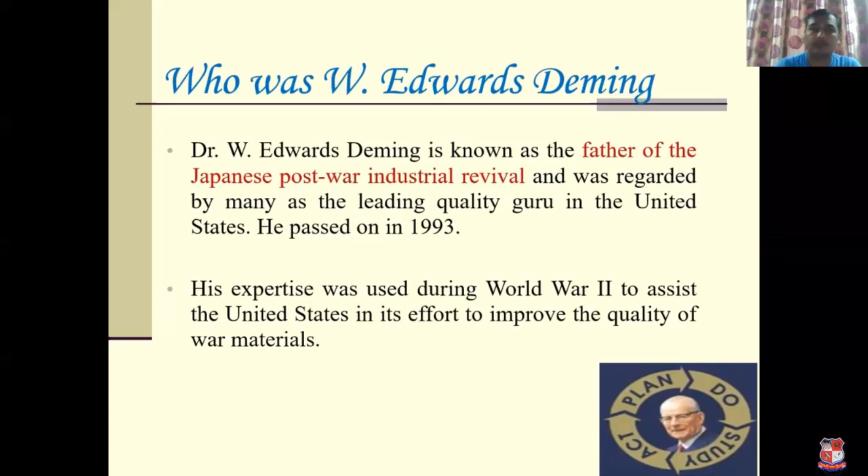So first we discuss Edward Deming. This is Edward Deming. Edward Deming is the father of the Japanese post-war industrial revival. He was basically from the United States, and he passed away in 1993. The United States of America utilized Edward Deming the most during World War II, with the main purpose to improve the quality of war material.

He got his PhD in the States in physics and maths. He got his first employment chance in an electricity company in Chicago. He taught physics, mathematics, statistics, and quality in Japan. Deming is known for a management philosophy of quality, which also improves productivity and competitive position.

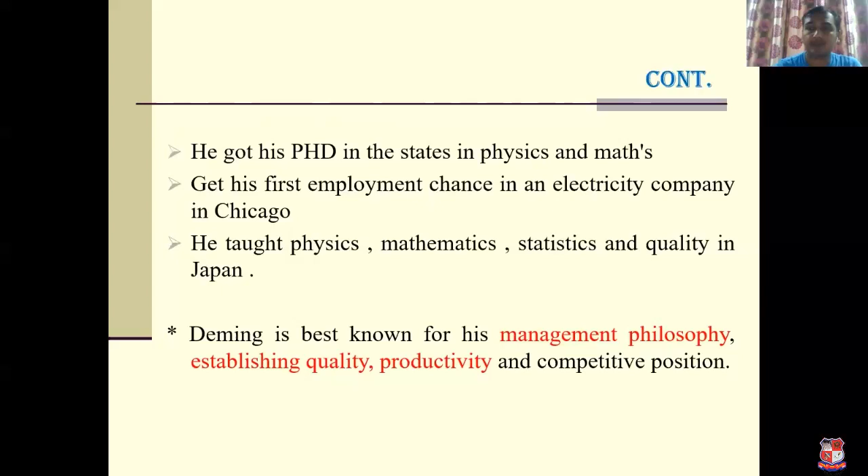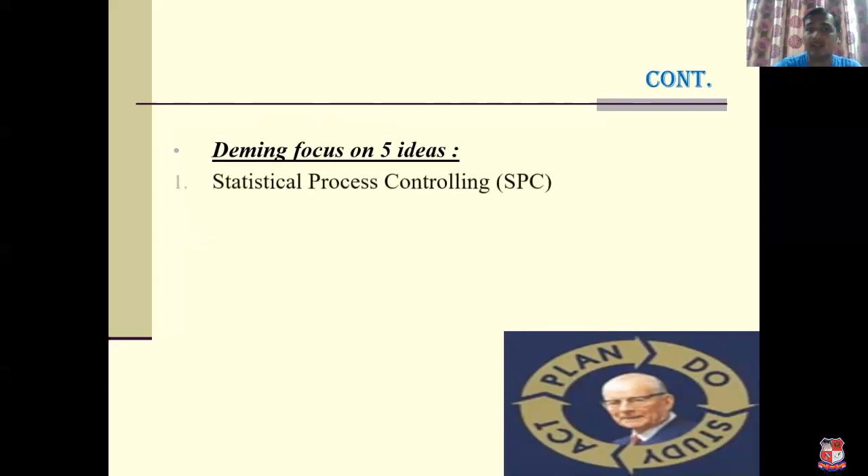Basically, Deming focused on 5 most important ideas. First, SPC, statistical process control. Second, Deming philosophy. Third, the 14 principles, the most widely used, the 14 principles of Deming. Fourth, the Deming cycle, also called the PDCA cycle, Plan Do Check Act, or Plan Do Study Act. The main purpose of the Deming cycle is continuous improvement. And the fifth one is the 7 deadly diseases of quality.

So first we discuss SPC. The main purpose of SPC is to achieve good quality. When we manufacture the product, SPC is the most important phenomenon to control the quality, meaning achieving good quality without defects. They also give the example of why a salesman cannot sell the same amount every month, and define it one by one.

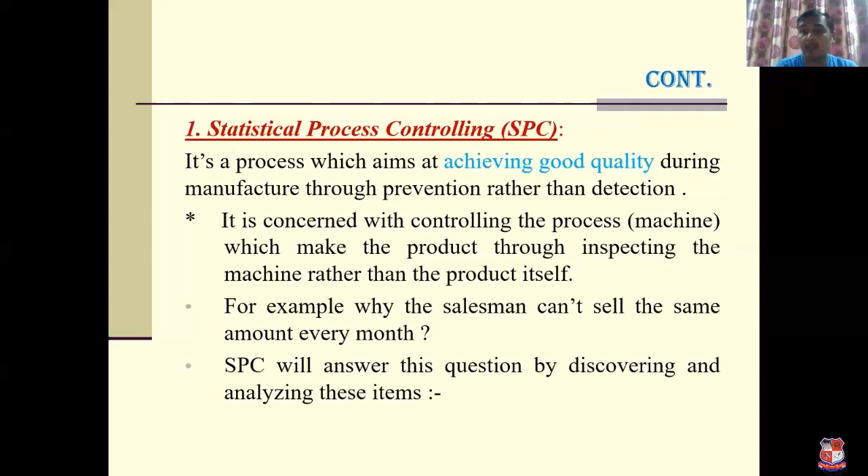They analyze items like common causes, special causes, natural variation, and significantly different variation. Common causes depend on machine failure; if the machine fails, we cannot achieve the quality. Special causes are not inherent to the process and should be defined, such as poor performance.

Third, natural variation. Natural variation means producing a certain amount of defects. It depends on the material; sometimes the material has a crack or defect inside. So it's a natural variation. And fourth, significantly different variation means discovering exactly where it is caused by management.

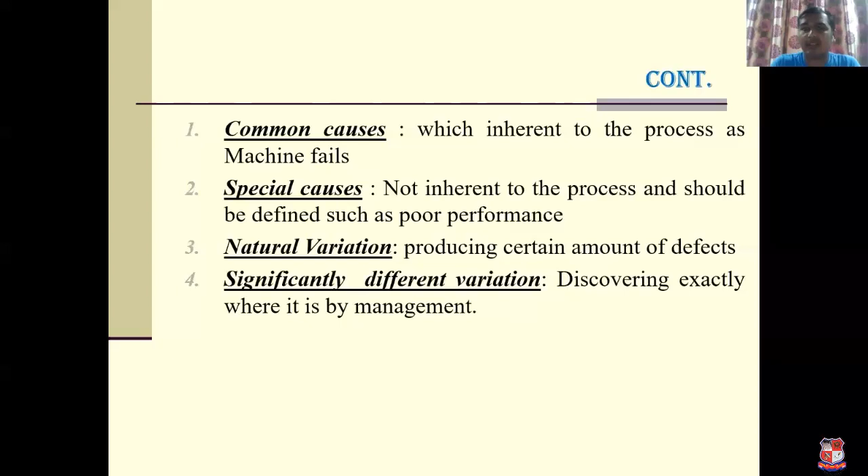Deming said 80% depends on the management and 20% depends on the employee. This is the thumb rule of Edward Deming, the 80-20 rule. It's just like a Pareto analysis.

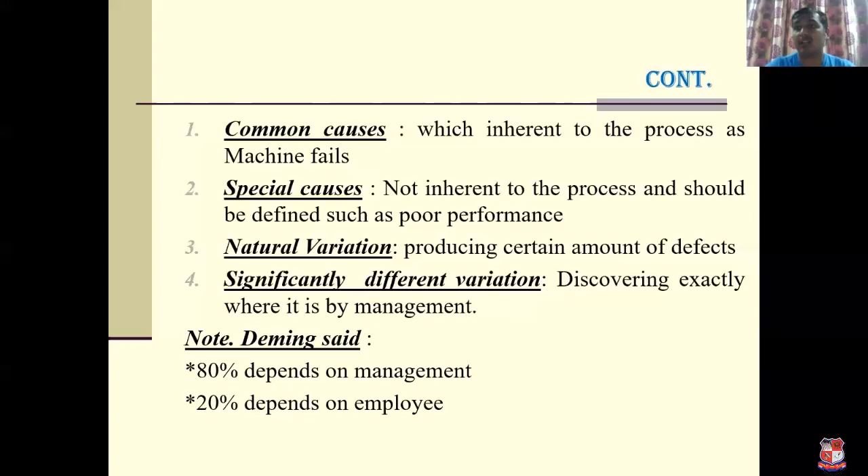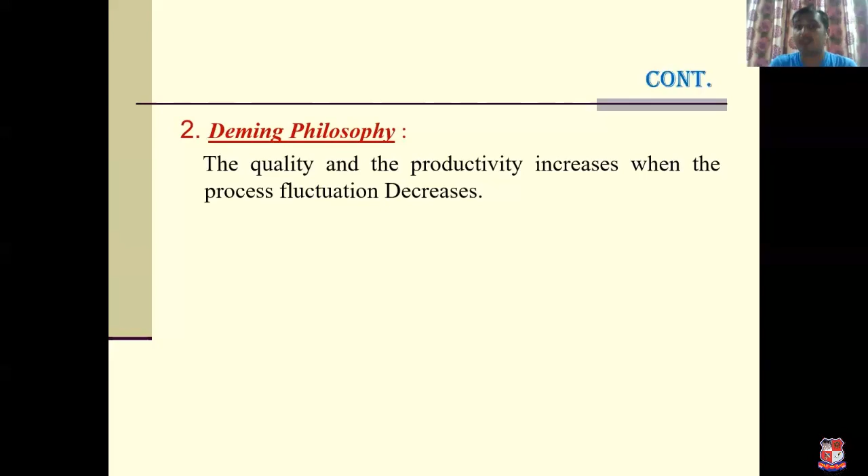Second, Deming philosophy. The Deming philosophy is about productivity: quality and productivity increase when process fluctuation decreases. This is the simple philosophy.

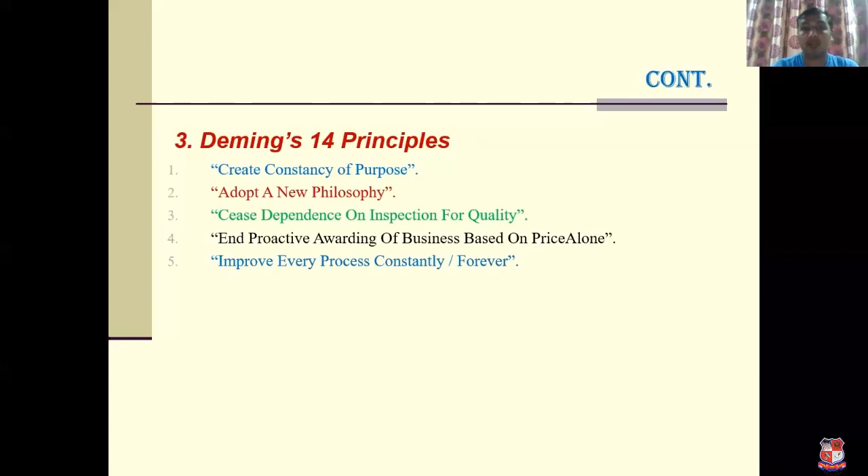Third, Deming's 14 principles. Most important is the 14 principles. We discuss one by one. First, create constancy of purpose. Adopt a new philosophy. Cease dependence on inspection for quality and ending proactive awarding of business based on price alone. Improve every process constantly or forever. Institute training. Adopt and institute leadership. Drive out fear. Break barriers between staff areas. Eliminate slogans, exhortations and targets. Eliminate numerical quotas. Remove barriers that rob pride of workmanship. Institute program for education and self-improvement. Last, put everybody in the company to work for this transformation.

So here are the 14 principles of Deming. We discuss only the first few. The first is create a constancy of purpose, meaning define the problem of today and future. Create constancy of purpose means define the problem for today and future. Other example, we can say allocate resources for long-term planning. And second, allocate resources for research and education. We can also utilize it in research as well as in education.

Second principle, adopt a new philosophy. Adopt the new philosophy means it basically depends on the quality cost. The quality cost should be less, not more. Or second, we can say call for major changes. Other thing, superstitious learning, etc.

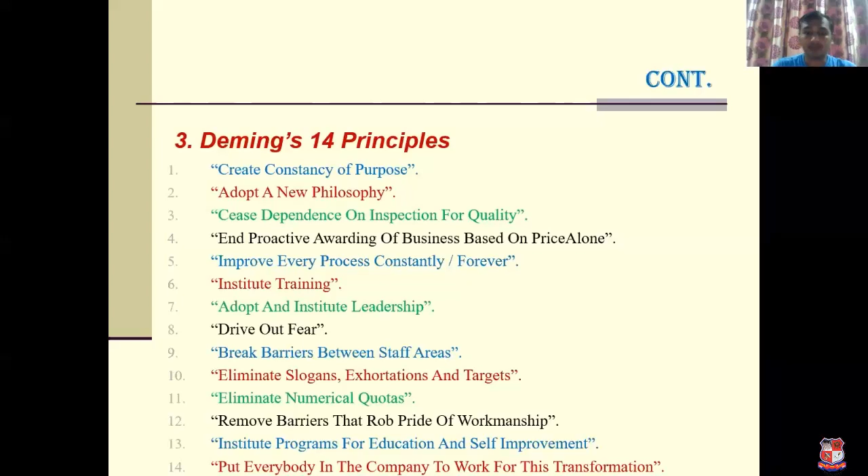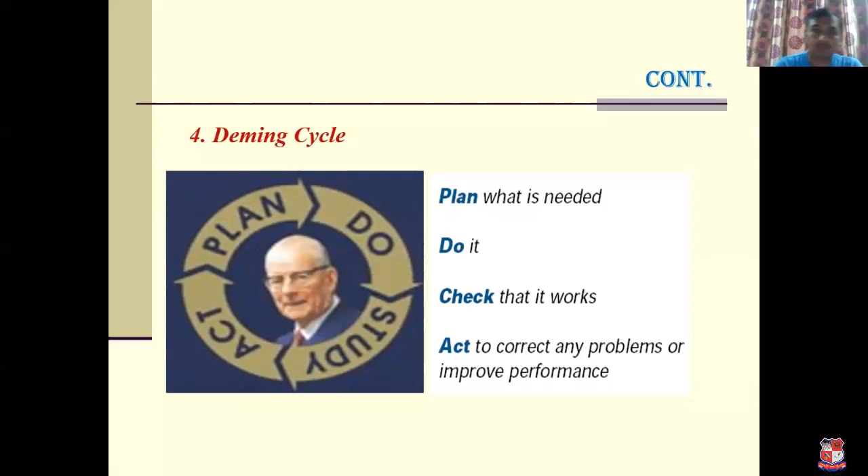Now we go to the second quality guru, Joseph Juran, who defines quality as fitness for purpose. Joseph Juran is an internationally acclaimed quality guru, similar to Edward Deming - both concepts are the same. Joseph Juran strongly influenced Japanese manufacturing practice. He defines quality as fitness for purpose or fitness for use. Joseph Juran also believed that quality does not happen by accident.

Joseph Juran proposed 7 ideas: quality definition, breakthrough concept, internal customer, quality trilogy, Pareto analysis, cost of quality, and quality concept. As told earlier, quality means fitness for purpose or fitness for use - meaning what is the real purpose, who are our customers, internal and external users, who are the possible customers? Second, breakthrough - this depends on the sequence of process improvement. It basically involves two journeys: from symptoms to causes, and from causes to remedies.

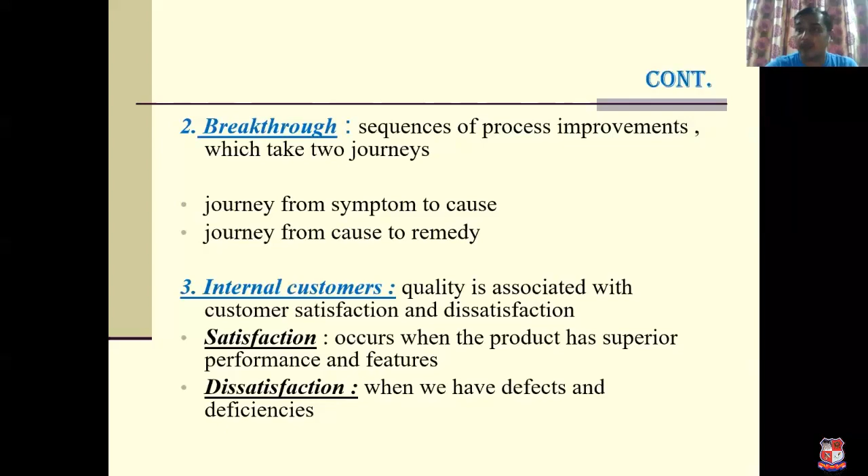And third is internal customer. In internal customers, basically what happens is sometimes the customer may be satisfied or sometimes dissatisfied. So internal customer satisfaction depends on satisfaction and dissatisfaction. Satisfaction occurs when the product has superior performance and features - if the customer is satisfied, then the product has superior performance and features. And when there is a defect or some problem, at that time the customer is not satisfied - this is dissatisfaction.

Customer satisfaction has two dimensions: internal and external. Internal means building the product or superior service correctly, and external means all the requirements should be matching.

Fourth is quality counsel, which depends on the expert.

Next we discuss Juran's quality cost. There are many costs depending on the quality cost, like appraisal cost, prevention cost, failure cost, internal failure cost, external failure cost, etc. Appraisal cost depends on inspection - it is the cost of activity designed to ensure quality or uncover defects, meaning inspection. Prevention cost covers total quality trainings and total quality plannings to prevent defects from occurring.

Next, failure cost. This is also the most important parameter in industry. It depends on defective parts or products - it is the cost incurred by defective parts or products.

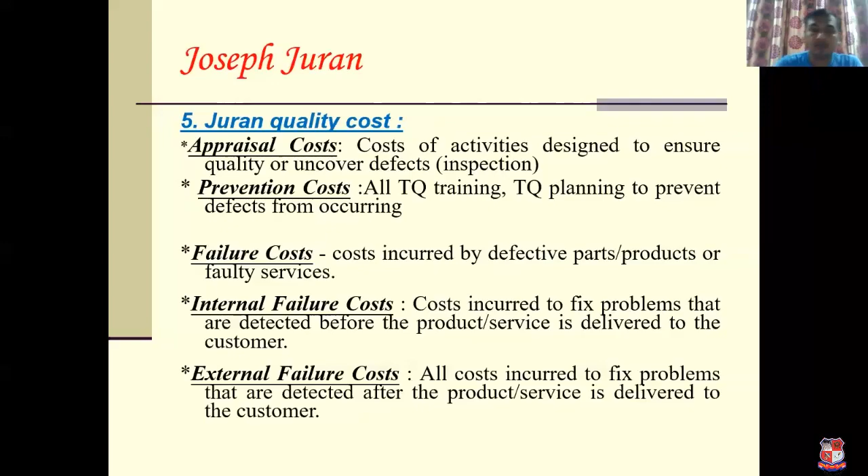Third quality guru's contribution is Taguchi. Taguchi defined the DOE. In the early 1980s, Professor Genichi Taguchi introduced the DOE, which stands for design of experiment.

The goals are: design a product or process robust to environmental conditions, second, robust to component variation, and third, minimizing the variation around the target value. Robust means the performance of the product or process.

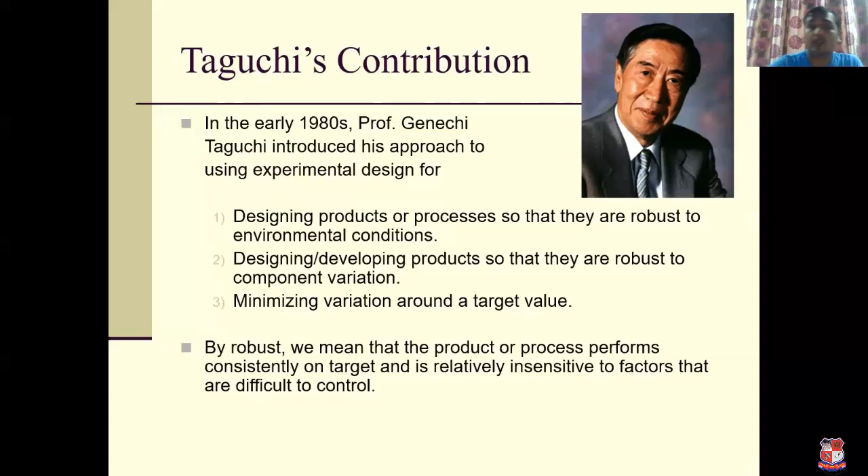The Taguchi philosophy basically depends on three stages. The first is system design, which means using scientific and engineering principles to determine the basic configuration.

Second is parameter design, the most important factor when we produce the product. For example, if our main purpose is surface roughness value, how to increase the accuracy in surface roughness depends on this parameter design. In parameter design, we decide which parameters to use, like depth of cut, speed, feed, force, etc., and it also depends on the material. A specific value for the system parameters is determined here.

The last one is tolerance design, which is also important. It depends on the value of alpha. Tolerance means the alpha value, used to determine the best tolerance for the parameters.

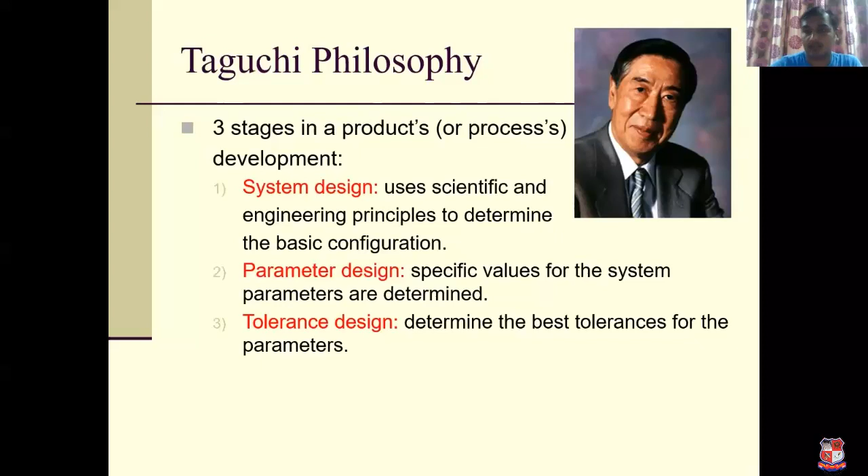He also recommended that statistical experimental design methods be used for quality improvement. Taguchi defined the orthogonal array L9. If we choose 3 parameters at 3 levels, that's 3 cubed, meaning we'd have to perform 27 experiments. But using the Taguchi philosophy, meaning DOE, we only need to perform 9 experiments - this is called the L9 orthogonal array.

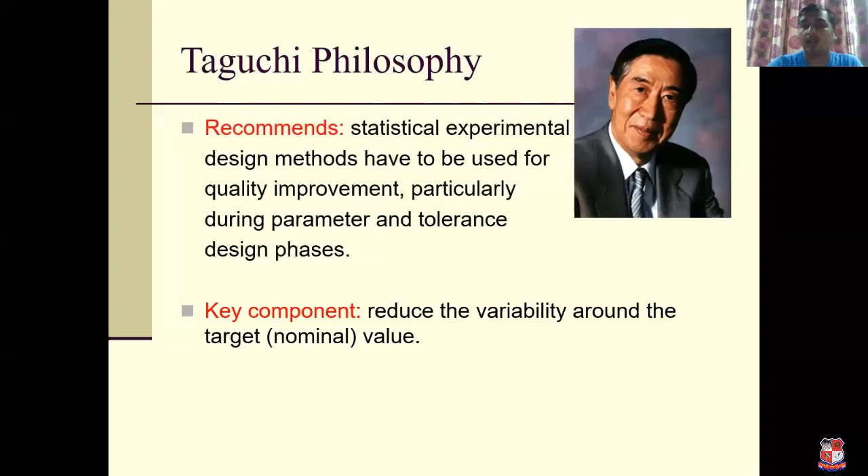Key components: the key component means reducing the variability around the target, meaning all values should be at the nominal value.

There are some internal and external benefits. First, internal benefits: reduce cost, increase dependability, increase speed, boost morale, increase customer retention, and increase profit. This is a simple summary of internal benefits.

Second, external benefits. First, the customer gets the correct product or service - this is most important. Second, correct specification and appropriate intangibles. Customer satisfaction is the most important external benefit - customers should be satisfied. And the last is customer retention.

There are also some drawbacks. It takes a long way to establish within an organization - it's very difficult to perform over the long term. QM design is not always fit for the purpose, and sometimes there is a loss of cost effectiveness.